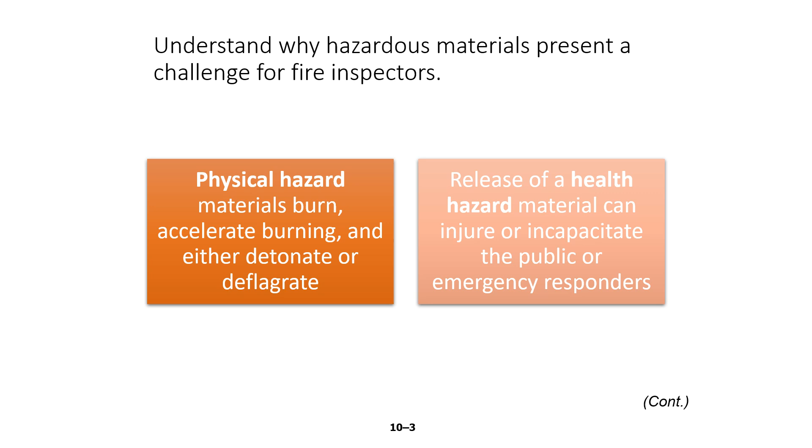An inspector examining the scope and purpose of the IFC or the NFPA 1 will find that over half of the codes are focused on hazardous material or processes that use these materials. So the IFC, the International Fire Code, or the NFPA 1, which is the Fire Prevention Code. Some of the examples of chapters that deal with hazardous material are flammable finishes, fumigation, dispensing for motor vehicle fuel.

When you look at the International Fire Code, we are looking at chapters 50 through 67 and NFPA 400, which focus on preventing and minimizing incidents involving the storage, use, handling and dispensing of hazardous materials.

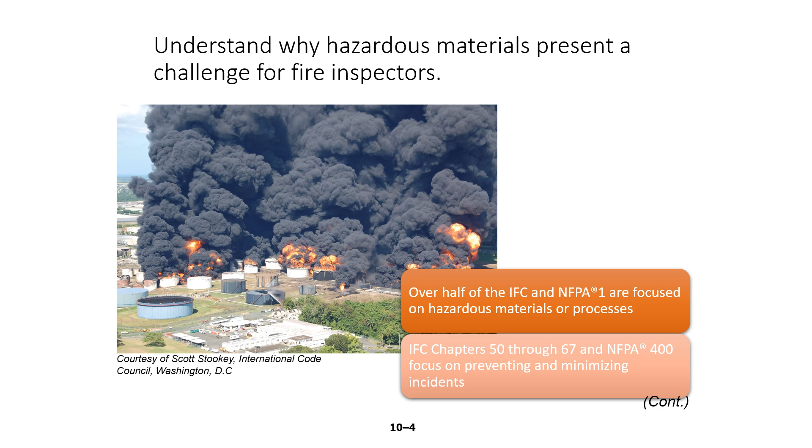When we're talking about hazardous materials, it is safe to say that in all of our jurisdictions, there is some level of exposure as far as hazardous materials go. So if it's material or processes, an incident can go from an ordinary fire to where the result of a fire can turn hazardous at any given time.

The slide here was a fire in a manufacturing plant up in Rockton, Illinois in 2021, a very large plant industrial wise, where from what I was told, there was some maintenance being done and somehow an ignition source involved some of the materials that were on hand, eventually involving a large portion of the facility.

Regulations and model fire codes emphasize reporting the storage and use of hazardous materials above certain quantities. Model codes mandate the permit applicant to submit a properly prepared hazardous material management plan or hazardous material inventory statement to the fire code official under their authority to issue either a construction or an operational type permit.

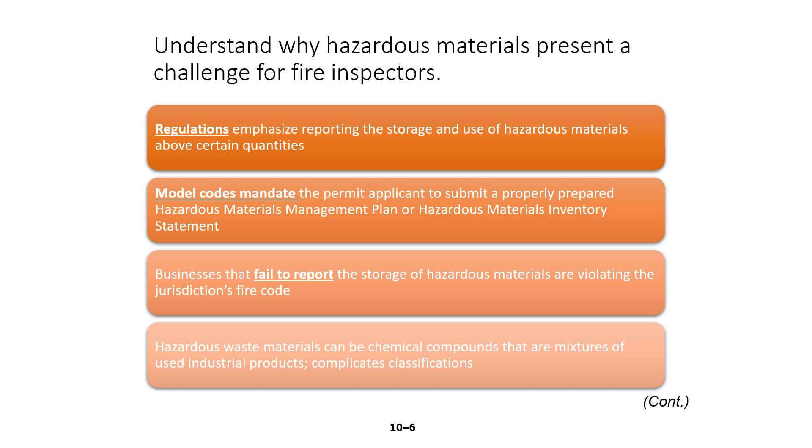Hazardous materials responses generally require that responding personnel be specially trained and equipped to manage a chemical release. Such incidents may also require additional time to mitigate, just like that incident in Rockton. The IFC and NFPA 400 both require, as a condition of an operating permit, that a business designate a fire department liaison or emergency response coordinator.

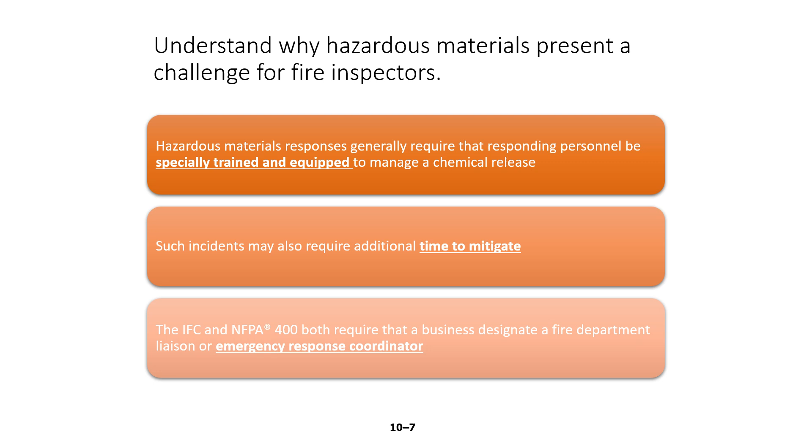They're going to be responsible for understanding the hazards of storing, using, and handling materials, responsible for explaining the site's emergency response procedures and access to the facility's safety data sheets. They may also be ready to assist the fire department in planning that emergency response, their tactics and strategy.

Confining a hazardous material in its container, tank, or vessel is of paramount importance. One of the bigger problems inspectors will find concerns the design and construction of storage tanks. There are numerous incidents where the wrong construction materials or wrong tank assembly methods have resulted in a hazardous material release. In addition, businesses may try to reuse abandoned tanks to store hazardous material. So once a design professional has evaluated used equipment, it can be used again safely.

So is there a possibility that a vessel can have multiple uses? Yes. And it's also a possibility that it has a singular use, and that's where you need to bring in the manufacturer or that subject matter expert to help you out. However, when the construction materials have not been compared to the hazard and the chemistry of the stored materials, the results can include rapid and catastrophic container or tank failure.

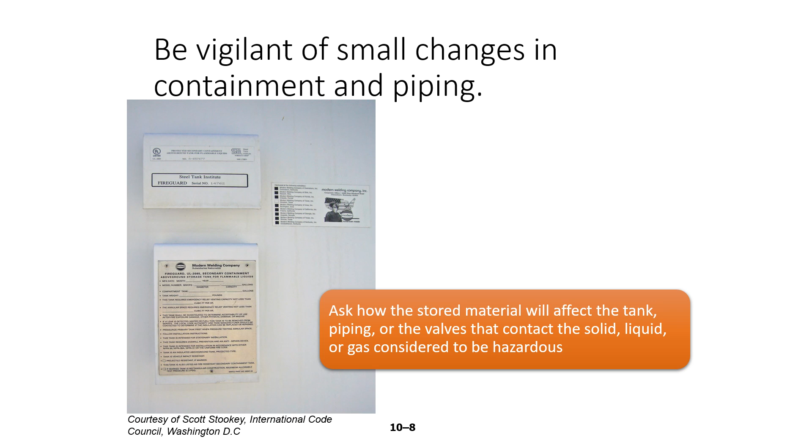Pressure relief mechanisms, or the mechanics, are critical for most processes or all processes, especially when we're thinking in terms of hazardous material. So regardless of the method, pressure relief is that important element that the fire inspector needs to, one, identify and be able to evaluate.

Hazardous materials stored in containers, cylinders, tanks, or pressure vessels are always assumed to be capable of being exposed to fire, and an unwanted fire can pressurize a container. It might create enough pressure to where the container might catastrophically fail, might explode if it doesn't have the proper means or the adequate means to vent itself via pressure relief.

So a pressure relief device can be heat activated or one that responds to an increase in pressure. It also can be a design where the container safely vents under controlled fire exposure.

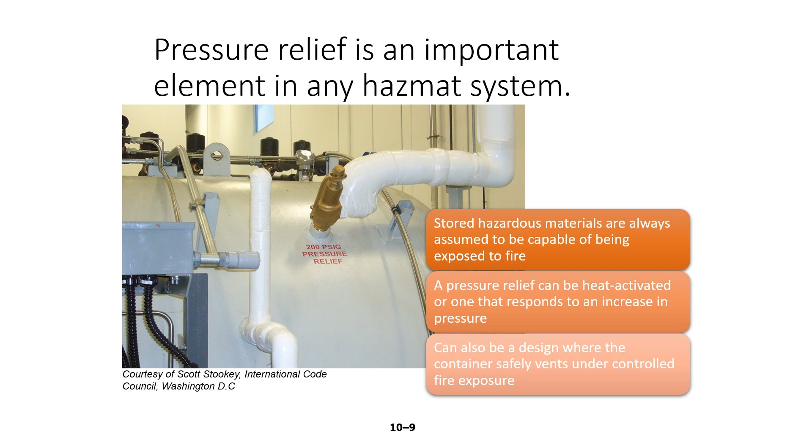All right, let's talk a little bit about hazardous materials and the reactivity and flammability and how we protect it. So many hazardous materials do have qualities to where they are flammable or can react violently or are, as I say, somewhat volatile. So NFPA 400 and the IFC, the International Fire Code, require certain levels of fire protection for many different classes of hazardous materials.

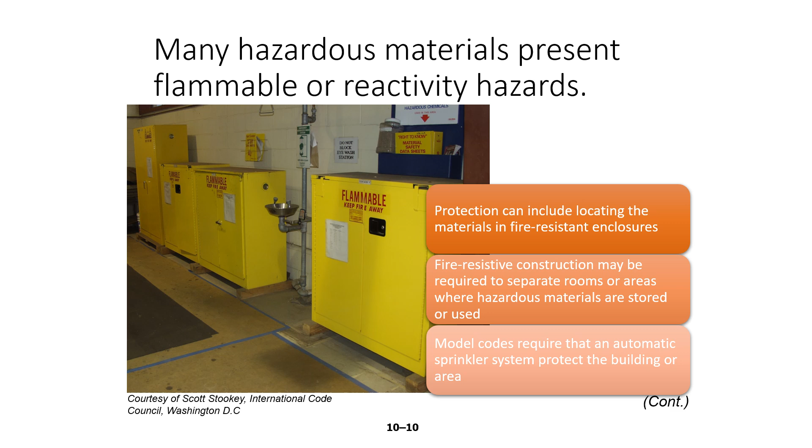So this protection can include locating the materials in fire-resistant enclosures like cabinets or enclosures that have some type of fire-resistant ratings, or hazardous material storage cabinets. So based on the hazards of the stored material, fire-resistant construction may be required to separate out the rooms or areas where hazardous materials are stored or used from other areas of a building.

In other cases, both model codes require that an automatic sprinkler system protect that area of the building or a section of the structure. The goal of the codes is to protect the stored material from fire and to limit the risk of its involvement. As an inspector, you'll need to rely on particular NFPA standards for a given class of hazardous material to determine if the sprinkler discharge density and the design area are correct for the stored materials.

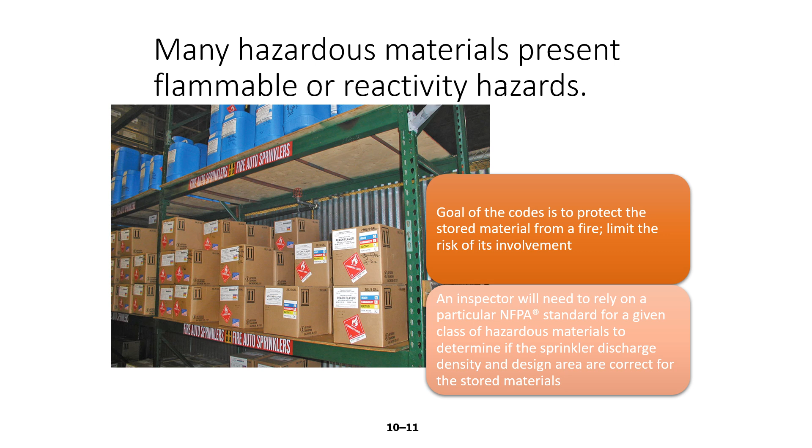All right, let's talk about some exemptions. The hazardous materials provisions in the International Fire Code and NFPA 400 cover a variety of processes and uses. However, these codes do not cover all situations where hazardous materials are stored, used, or handled. In some cases, federal or provincial laws preempt their storage or use. In other cases, specific requirements in the model codes take precedence over the hazardous material requirements.

It's important for inspectors to understand that certain activities or processes that involve hazardous materials may be exempt from regulation, including the transportation of hazardous materials, pesticides, fungicides, and rodenticides, and then certain building systems.

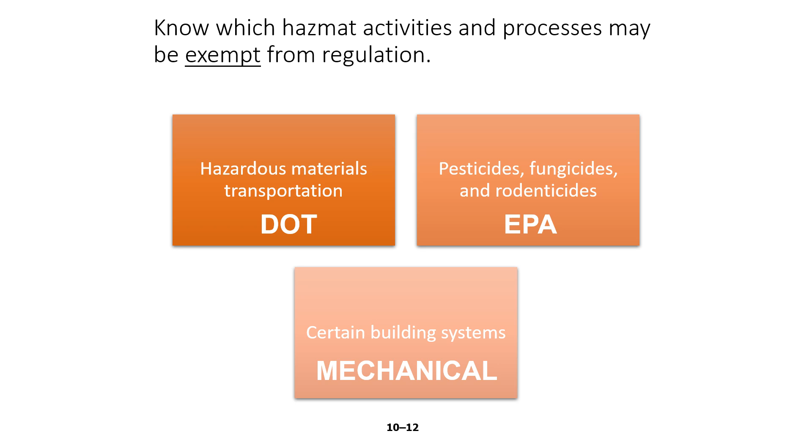Hazardous materials transportation is outside the scope of the International Fire Code and NFPA 400. The Department of Transportation and its Pipeline and Hazardous Materials Safety Administration, PHMSA, regulate hazardous materials transportation and its pipelines in the United States. The IFC and NFPA 400 regulate facilities that store, package, or use hazardous materials.

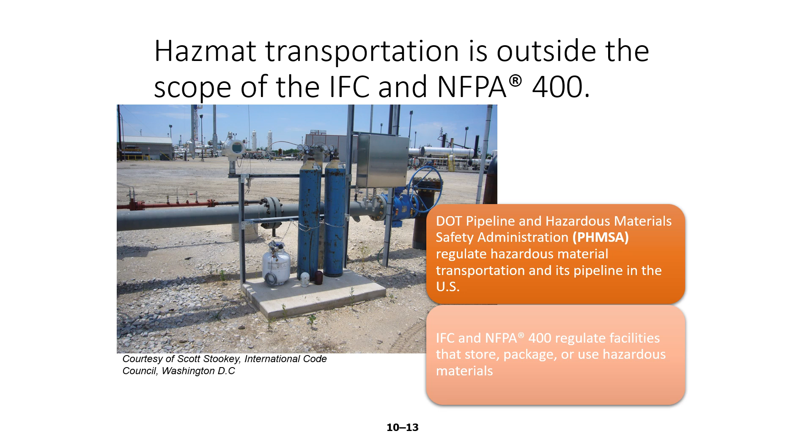Another exemption is the application of pesticides, fungicides, and rodenticides. The U.S. Environmental Protection Agency, EPA, under the Federal Insecticide, Fungicide, and Rodenticide Act, FIFRA, approves the use of these types of materials in the United States. The exemption does not limit the inspector's authority to apply the fire code to the storage or manufacturing of these materials.

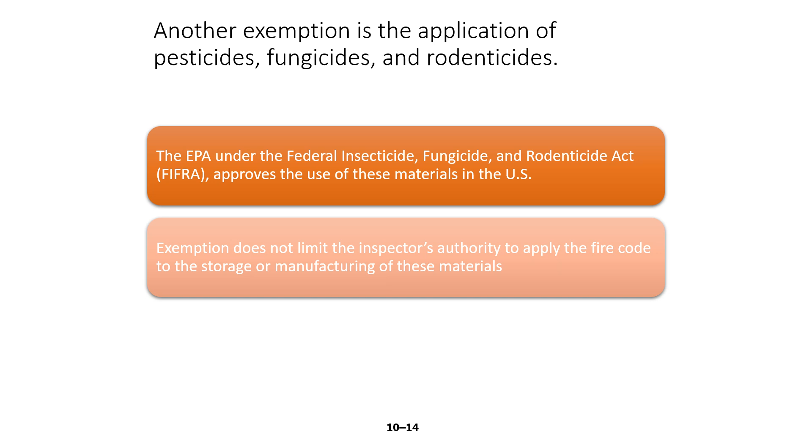Certain building systems that store or use hazardous materials can be exempt from hazardous material regulations. In the IFC, mechanical refrigeration, fuel oil storage, and stationary storage battery systems are generally exempt from the hazardous materials provisions. To accomplish the code's intent, fire inspectors must become familiar with the adopted codes in your jurisdictions and the standards applicable to hazardous materials storage, use, and handling.

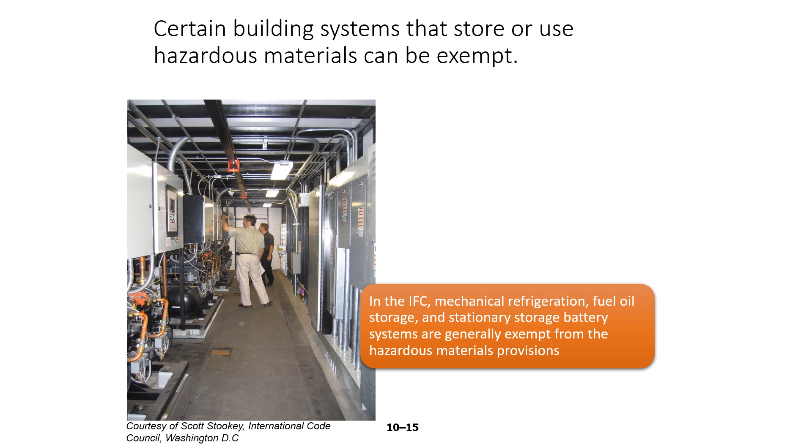The IFC and NFPA 400 adopt a number of standards by reference. These standards reflect the minimum requirements for the design and construction of containers, cylinders, tanks, and piping systems. They also address proper marking and identification of cylinders and hazardous materials piping. There are other standards that provide guidance to the fire inspector in ensuring the proper classification of gases and other materials.

So that concludes objective number 1, and I look forward to speaking with you in objective 2.